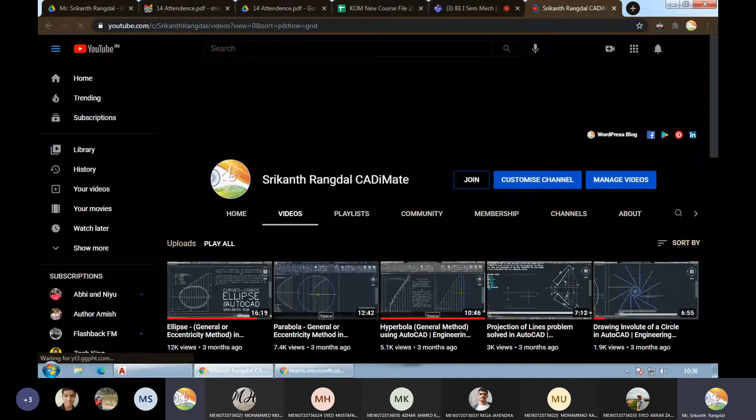So there is one video which I have already recorded some time back, that is projection of lines, and that problem is the master diagram. Okay. So it is the fourth most popular video on my channel. You can see it here, and I'm sharing that to the Teams chat. And also I'll load it to the WhatsApp group.

Okay, so in today's class, please watch this video. The video length is 7 minutes, so I will give you 15 minutes to watch this video, because some students will be joining late. Some students may want to repeat something which I have told in the video. So take around 15 minutes to watch that video, understand this problem, try to do the problem as it is, the same way it is explained in the video, in AutoCAD.

So after 15 minutes, if you have any doubts, you can raise your hand, I will clear those doubts, and after clearing the doubts, I will take up one or two other problems based on the same topic. Okay.

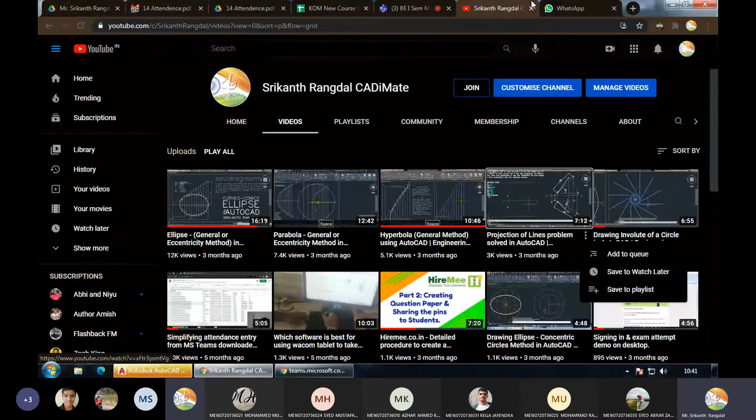Okay, still loading. What about others? Only 13 members joined today. In the first hour also the strength was the same. Yes, sir. So some people want to take a break, it seems. And if that is the case, then we may have to repeat this topic again. Still loading.

So everyone has started watching that video? Yes, sir. Watch it and parallelly try to do that problem in AutoCAD. Yes, ma'am? Can you share that video in WhatsApp? Yeah, it's coming up. Yeah, shared. Staff room, new staff room.

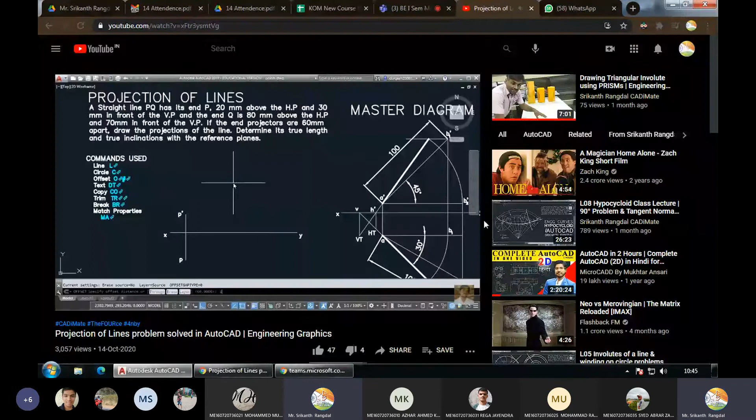Hello. Are you getting the sound of this video which I'm playing? Not clearly, sir. We just watch it on YouTube, but we can adjust it by using the headphones. Yeah, so you watch it on your YouTube app. From here, I'm unable to play it correctly. I don't know why sound is not coming for you. Just 5 more minutes, then we will start taking the doubts. So anyone who has a doubt can start asking. There is no problem.

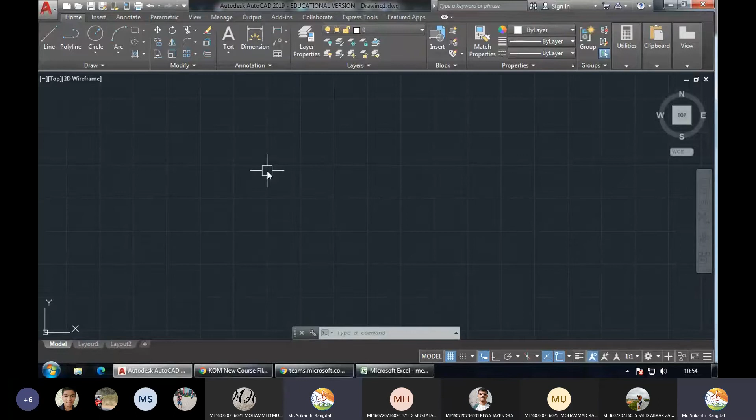Excuse me, sir. Hello. Hello. So I hope you are done watching this video. Are you all working on that? Please confirm. Hello, are you getting my sound? Yes, sir. You're audible, sir. Very good. So have you worked on that?

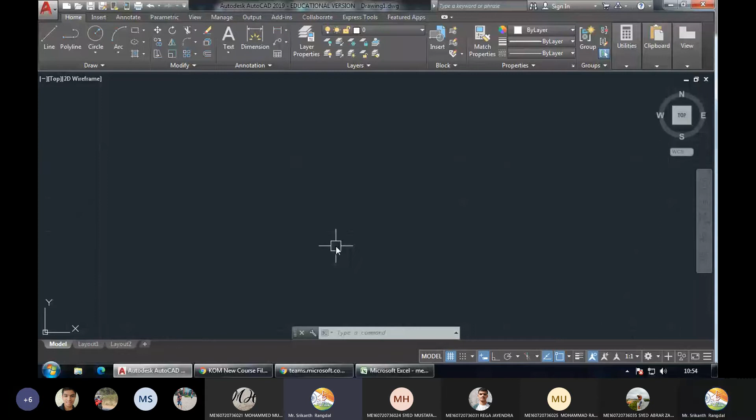How many of you have done that problem? If you have completed the problem, please raise your hand. Okay, no raised hands. Nobody completed that. It seems you need more time to do that. So take your time, but complete it.

So this is a very important topic, because this topic helps you find out the length of inclined lines in 3D space. Sometimes you are required to find the shortest distance between 2 points in space. So how will you find that? There are various methods, but projection of lines is a graphical method to solve that kind of problem.

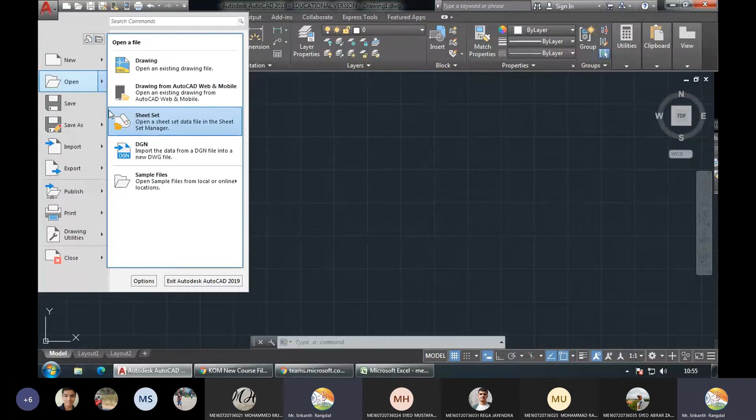Okay. So I will just explain to you the master diagram once. If you are watching the video still, please stop it and listen here once. Where is that thing? It's just here. CAD.

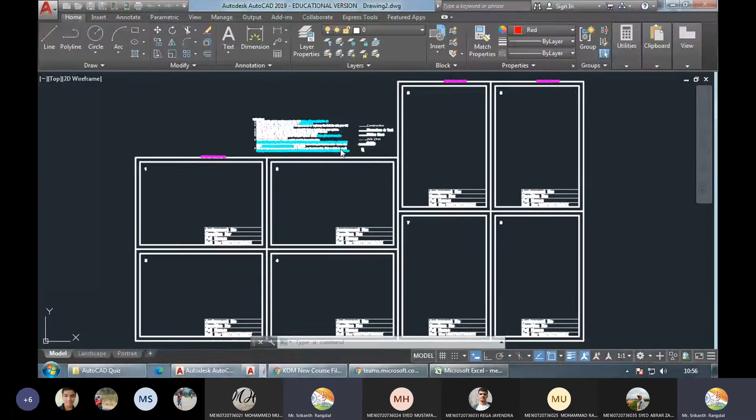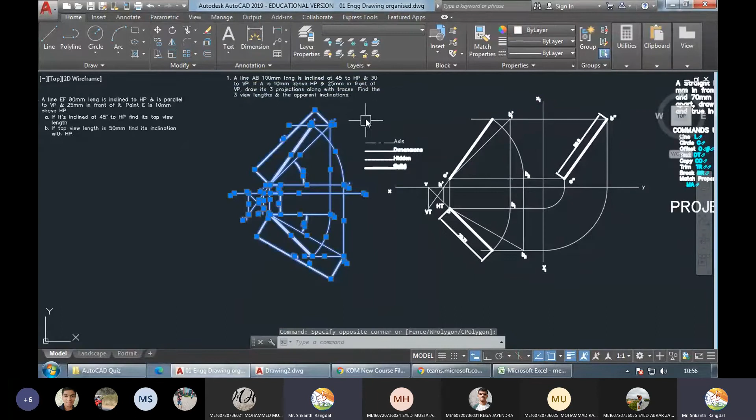So as I told, this problem that we are solving today is the master diagram for projection of lines. If you understand this one problem perfectly, with this understanding you will be able to solve any problem that you come across on projection of lines. Okay, so this is the problem. Just take this into the template. There it is.

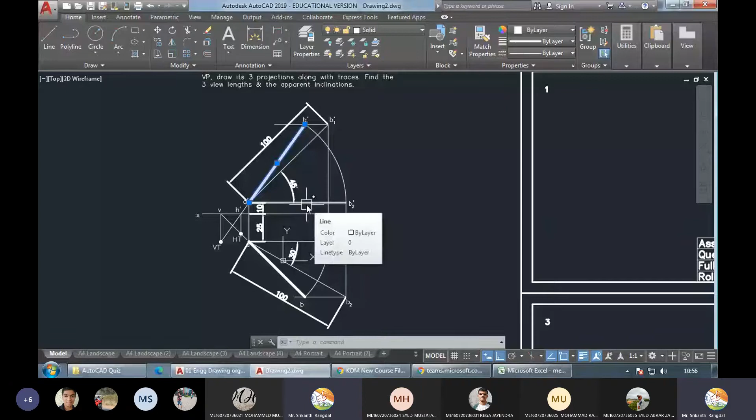Now once again, this is a line which is present in 3D space, and we are drawing it on a 2D plane. So this is something which we should understand perfectly. Now let me go ahead and explain to you the process.

So first of all, if the line is placed horizontally, then the actual length will be visible in both the views, in the front view as well as in the top view. Are you getting it?

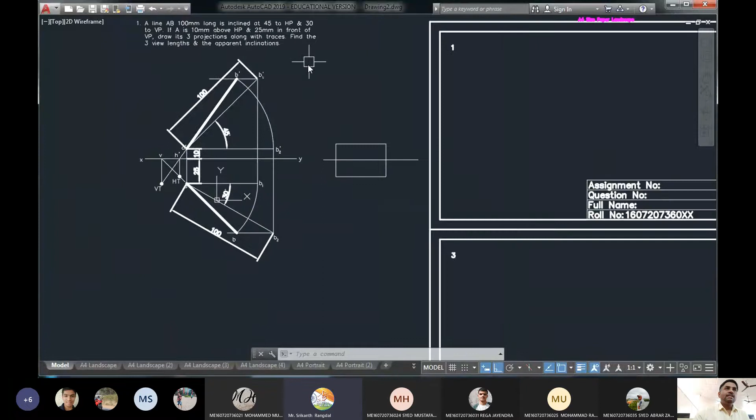Now today, we are considering a line position wherein the line is inclined to both the planes. We have to understand in a step-by-step order. So first of all, let us understand when the line is inclined to a single plane, and then we will take both the planes at the same time.

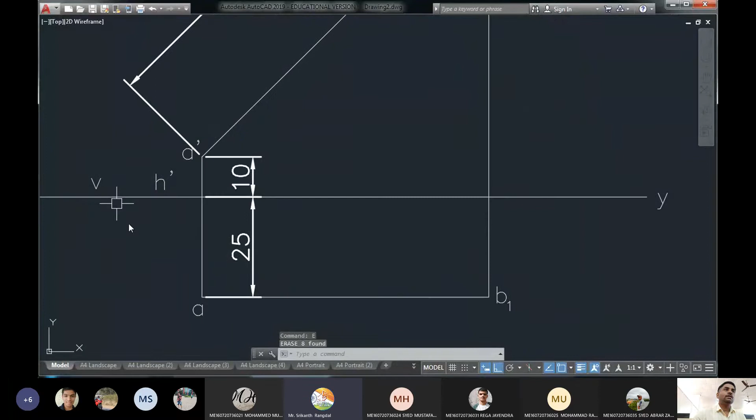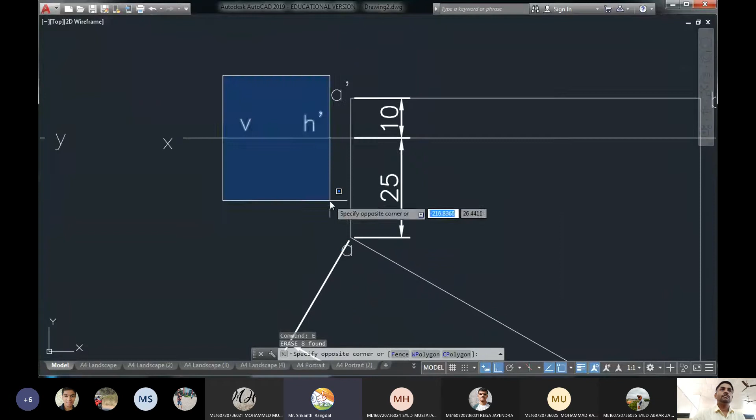So in the first step, I will just assume that the line is inclined only to HP. All this also will not come. So this is the line which is inclined only to HP. Now here in this problem, I'll delete everything, and we will take a situation wherein the line is inclined only to VP. So here the line is inclined only to VP, and here the line is inclined only to HP.

Now let us understand these diagrams with the help of this plane. Can you see this plane? VP, HP, can you see this? Yes, sir. So let us say that this line is the line AB. Now when I'm placing this horizontally like this, what will happen? The true length will be visible both in the top view and the front view.

But when I start inclining it with the HP, in which view can we see the angle? Front view. We can see the angle in front view. Very good. And in which view will the true length be visible? True length means? Whatever is the length of this pencil, the same length should appear in the projection. So in which view can we see the true length? Front view, sir.

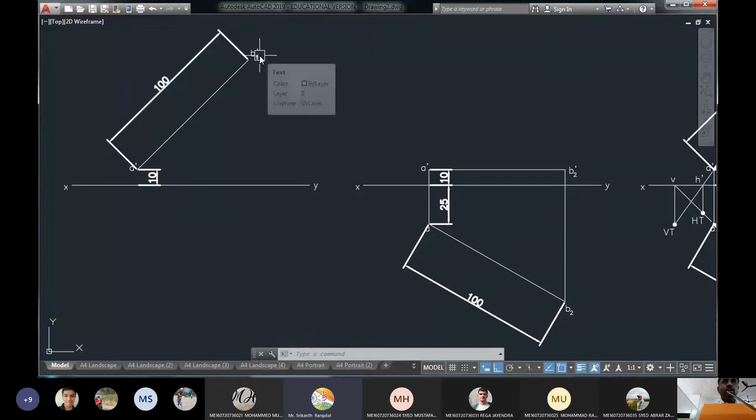Very good. So we can see the angle of inclination and the true length in the front view. Now this information we will use to first draw the front view. So this is our first step. We have to take a point 10 mm above and draw the front view. In the question, angle with HP has been given. How much is the angle with HP? That is 45 degrees.

So at 45 degrees, we have to draw this line. After drawing this line at 45 degrees of 100 length, we will get this point. Then we have to project this with a straight line and draw a horizontal line to get the top view.

Now top view, will it be of same length or different length? You see, the line is inclining like this. So when it is getting inclined like this, what happens to the length of the top view?

It will decrease, right? Yes, sir. The length of top view will decrease. So by how much it will decrease, we can find by projecting this point, by projecting this point straight.

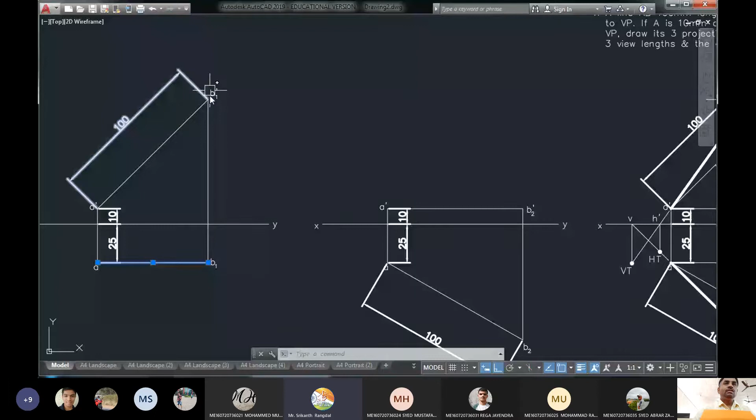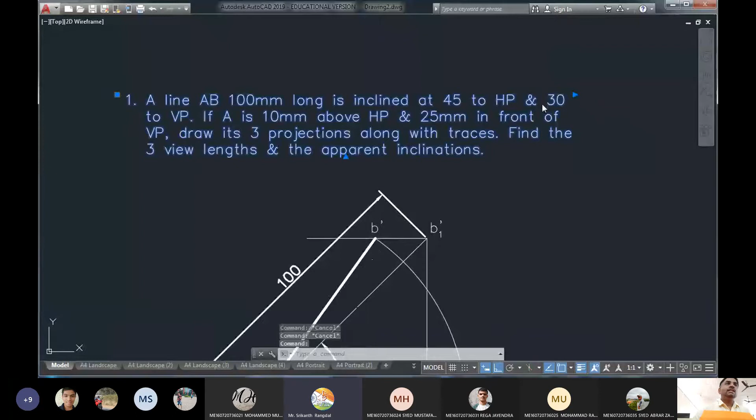Okay. Now the same we have to do for inclination with VP. So angle with VP has been mentioned here in the question. What is the angle with VP? Here you can see it's been given. Okay, this is 30 degrees. So angle with VP is 30 degrees. So first again we have to mark the first point. The front view and top view of the first point we have to mark. Then in the top view, because inclination with VP will be like this.

Can you see my video? Can you see my video?

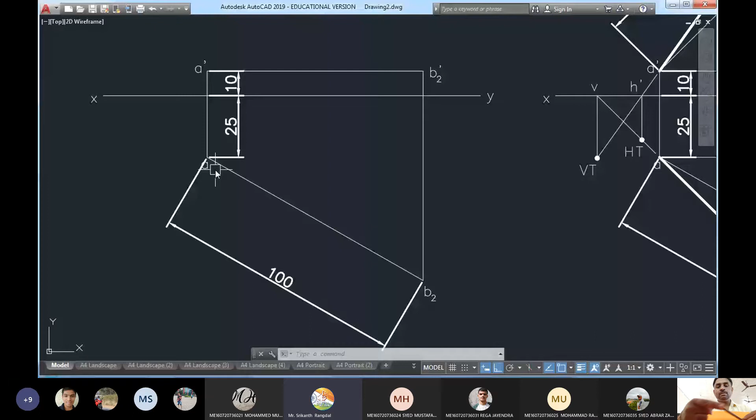Yes, sir. So inclination with VP will be like this. So true length will be visible in which view? True length will be visible in top view, and angle of inclination will also be visible in top view. When you see from top, true length and angle of inclination both will be visible. So that is why we have drawn the angle and the true length over here.

So true length of the line is 100, and you can see the angle that we have drawn. It is 30 degrees. Fine. So this is how first we have to draw the top view. After drawing the top view, coming to the front view. Now, what is the length of front view? Is it same or changing? When the line is getting inclined, the front view length, will it change or remain the same? Change, sir. It changes. Very good.

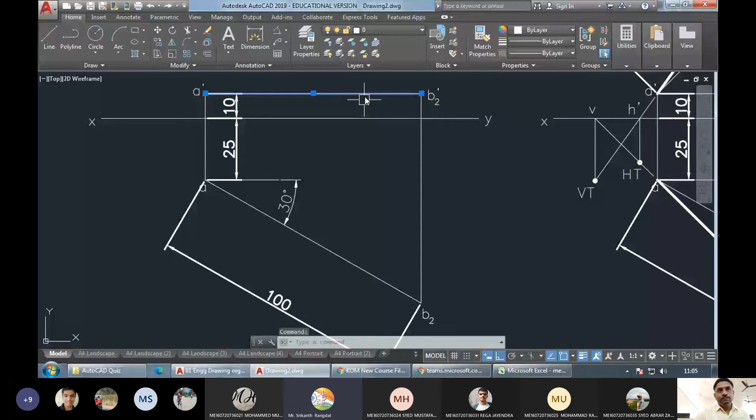So how much it will change? That we can find by using this projection line. Okay. So this angle of inclination, depending on how much it is turning, if it is turning up to this point, let us say, from here we have to take a projection, and this length between these two lines is the length of the front view. In our case, for our problem, angle given is 30 degrees. So from 30 degrees, this point we have drawn a projection, and this is our front view.

Okay. So these are the two problems. Sometimes you will be asked only for these type of problems. When the line is parallel to one plane: in this case, line is parallel to VP and inclined to HP, and in this case, line is parallel to HP and inclined to VP. So some problems you will be asked only to solve till this point, so you can just solve it and leave it here itself. In some other problems, you will be told to find the projections when the line is inclined to both HP and VP. So that's where this problem will come up.

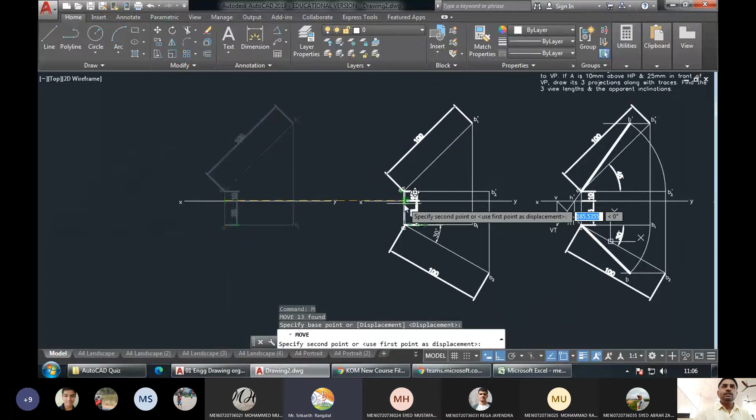Fine. So both these diagrams we have to draw overlapping each other like this. Now we have to find the position of line when it is inclined both to HP as well as VP. So how to do this? For doing this, the theory you should understand. So suppose I am maintaining this angle constant.

My video is visible? Is the video visible? Yes, sir.

So suppose I am maintaining this angle constant and I am rotating the pencil. Now tell me what happens to the top view and what happens to the front view. What is the path that the front view and top view of this point will traverse? So when it is rotating like this, keeping this angle constant, first let me ask you, what happens to the top view? Its projection. What is the path taken by the top view?

Top view travels in a circular path, right? Yes, sir. Top view travels in a circular path. And what happens to the front view? When it is rotating like this, what happens to the front view? Front view will travel in a straight line. Again, front view will travel in a straight line. Yes, sir.

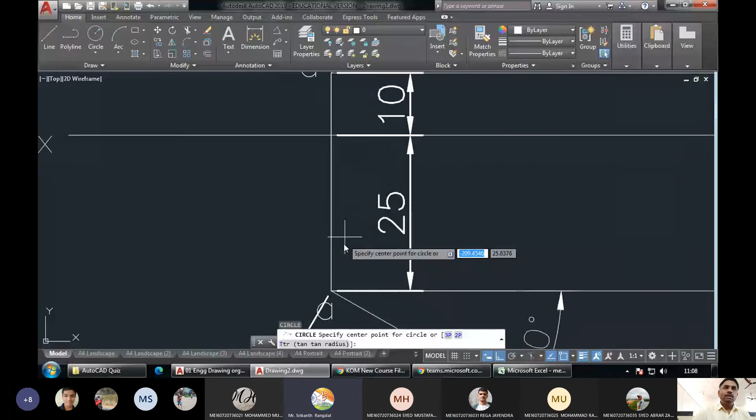So top view will travel along a circular path. So this is the circular path. And front view, this is the front view, right? So front view will travel in a straight line. Correct?

Now same way, when we take up the inclination with VP, this angle I want to keep constant and I want to rotate it like this. Are you getting it? Angle with VP I'm maintaining constant and I'm rotating the pencil like this.

Now, what is the path taken by the front view? Front view will be traveling along a circle, right? And what happens to the top view when it is moving like this? Top view will travel in a straight line.

So that's what we have to do now. So take a circle from this point straight here, and this will travel in a straight line. So now we want both the conditions to be satisfied. We want the line to be at 30 degrees to VP, and at the same time we want it to be at 45 degrees to HP.

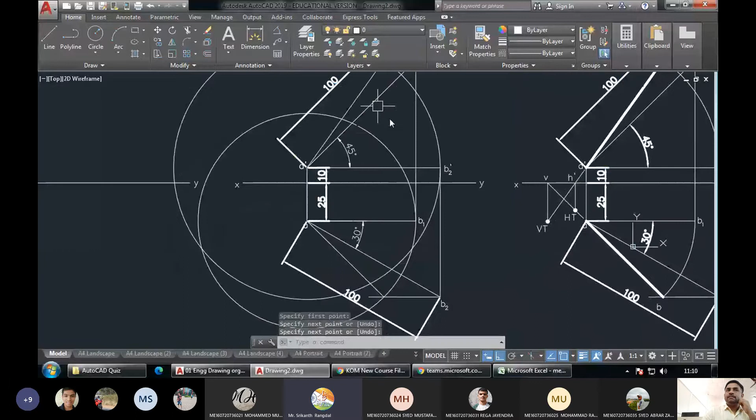So you can just trim them by selecting these two lines. TR, enter. Enter you have to press a single time when you are selecting the lines. So after selecting lines, press TR, enter, then click on the part of the circle which you don't need. So this completes our diagram.

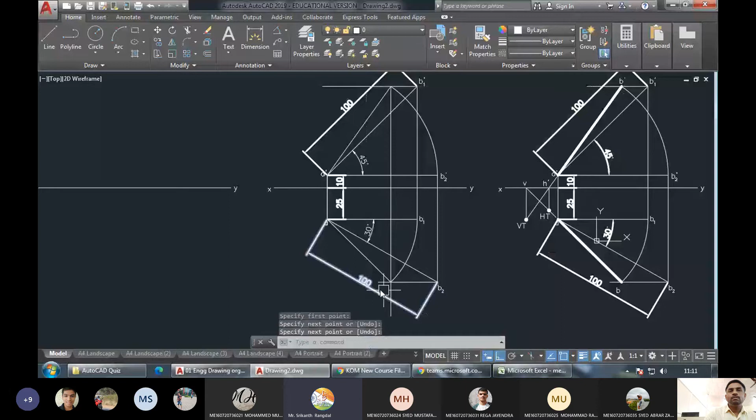Now one thing you have to understand here is, after drawing the complete diagram, if you want to check whether your diagram is correct or not, you have to take a vertical line from this point. And that vertical line should pass through this intersection point. If it is not passing through this intersection point, then you have made some mistake.

So this is like a litmus test for you to check whether you have solved the problem correctly. Is it clear?

Sir, can you just repeat the entire process in a short way, sir? Okay, in a short way. It's already there in the video, and this class is being recorded. But anyway, I'll repeat it in a short way, fast forward.

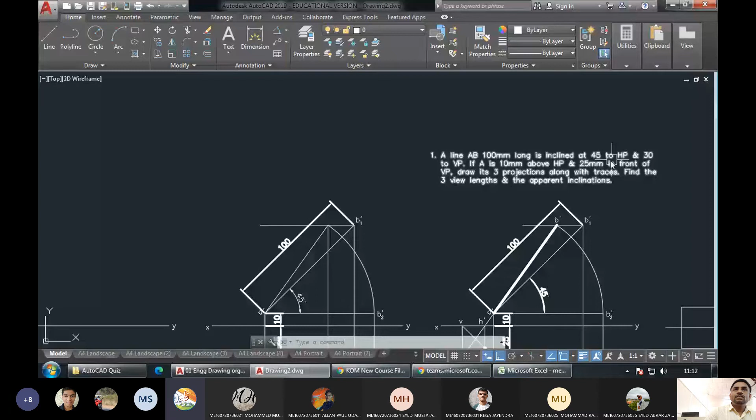So first step, you have to start with one of the inclinations. Either you start with inclination to HP or with inclination to VP. So I'll start with inclination to HP. We have to draw this line, and when you project that, you will get this line. These two lines we will get first. So this is the projection for inclination to HP only.

Then we have to take inclination to VP. So draw this line with 30-degree inclination to VP, then project this till this horizontal line. You will get both the front view and top view for inclination with VP only. Then we need a position wherein both these conditions are satisfied.

So what you have to do, from here you have to draw an arc with center point here at this point, and from this point again you have to draw an arc with center point here. Then you have to draw a straight line, horizontal line from this point and a horizontal line from this point. Okay, the intersection of this arc and this horizontal line will give us the final position of the point B. So this becomes the final top view.

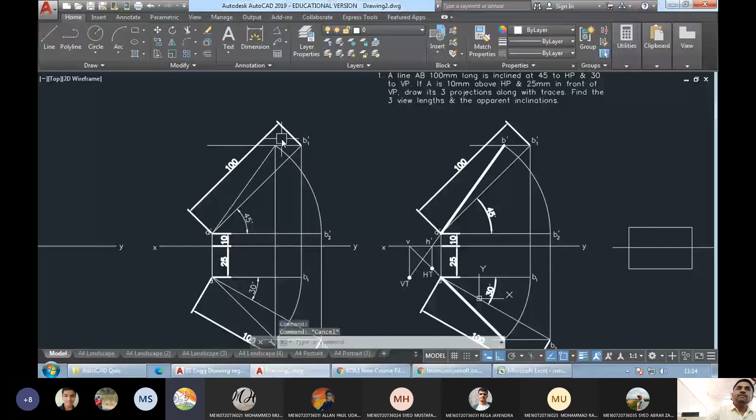Same way, intersection of this arc and this horizontal line will give us the final point, the final front view for the point B. So that we will get it here. So join that to get the final front view of the line. Okay, so this is the final front view of the line.

So now we just have to match the properties. Only what is asked in the question, what is the final answer, that should be made dark. So because this is the final resting place of the line, only that line we have to make dark. Everything else that we have drawn here is just for construction purpose. So it should not be made dark, it should be left as it is.

Apart from that, if you have any dimensions or the names, you have to apply the dimension thickness on that. So use match properties to apply the same properties as the dimension to all the dimensions and all the text. Is it clear? Yes, sir. Thank you, sir.

Okay. So there is one more part here, one last part, and that is called trace. Fine. So trace is a point. Trace is a point of intersection between the line when it is extended and when it meets HP or VP. So there are two traces possible. One is the horizontal trace, where the line intersects the HP. Actually, the line may not be intersecting.

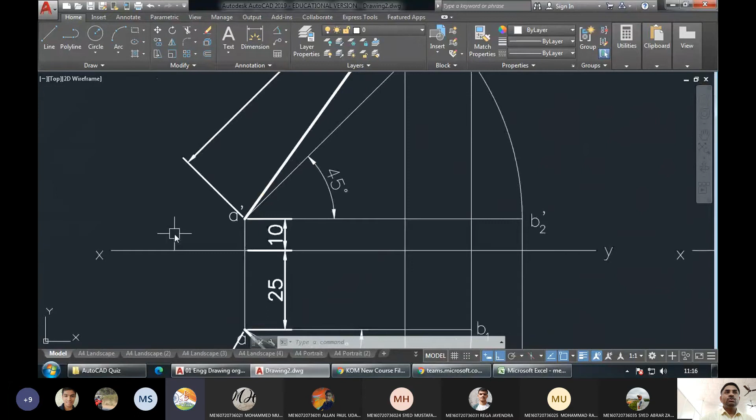So what you have to do is you have to extend the final front view. Don't extend this line. This is just a temporary line, not the final front view. So this is the line which you have to extend. Now, what is the command for extend? Extend command is EX double enter. So EX double enter, you press it, then click on the final front view till it intersects the XY line.

Now this point, what is this point? That is the front view of horizontal trace. So front view of horizontal trace, we have to name it using small letter h and a dash. Because this is the front view, we will be placing a dash.

Next, you should also extend this line. Again, we have to extend the final top view, not the temporary top view. So again, EX double enter, click on this line till it meets XY line. Fine. So what is this point? Now we are extending the top view of the line. So the point that we get here is the point where line meets VP, but it is the top view.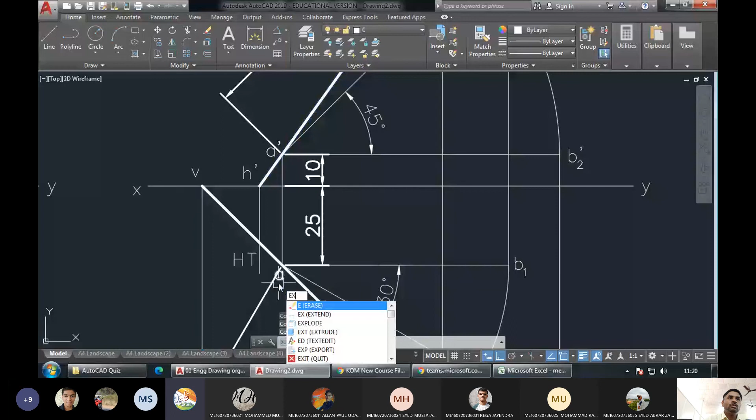Okay. Next step, we already have the top view of vertical trace. Now we have to find its front view. To find the front view, again we have to take a projection line, and we have to extend the final front view till it intersects this line. So once again press EX, double enter, and then go on clicking on the line till it intersects this line. So this intersection point that we got, what is that point?

What is this point? It is the front view of the vertical trace. Once again, we will not be naming it as v dash. We will be naming it with capital letters VT. The reason is same. We are doing this because the actual vertical trace will also come at the same point.

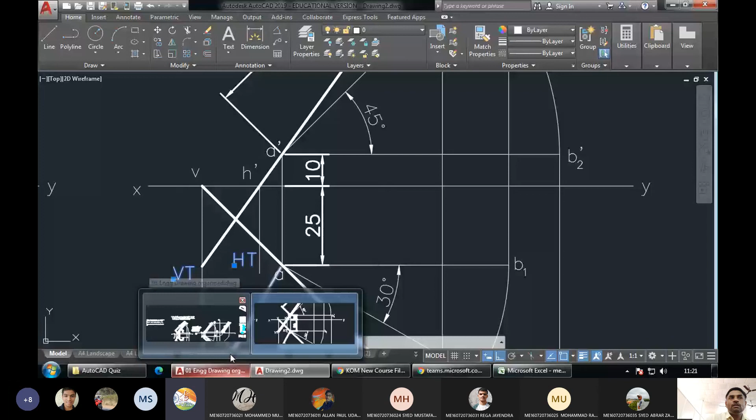Not the front view or top view. Front views and top views we always name with small letters. But this is the actual vertical trace, and that is more important to us than its front view or top view. So we are naming it with capital letters. So that's how you can complete the horizontal and vertical traces. Now these extension lines, they need not be dark.

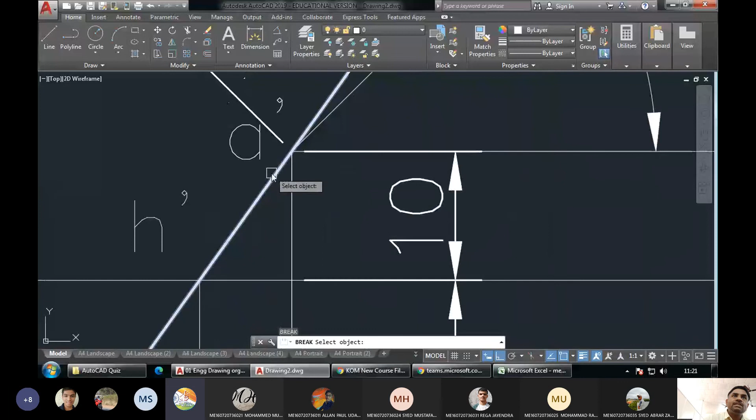So how to solve that problem? We can just use the break command. Write down the break command, BR enter. Use the break command to break a part of this line here. Now this line is different and this line is different. So once again use the break command, BR enter. Click here, after this point, and then click exactly at this point. So this line becomes separate from this line.

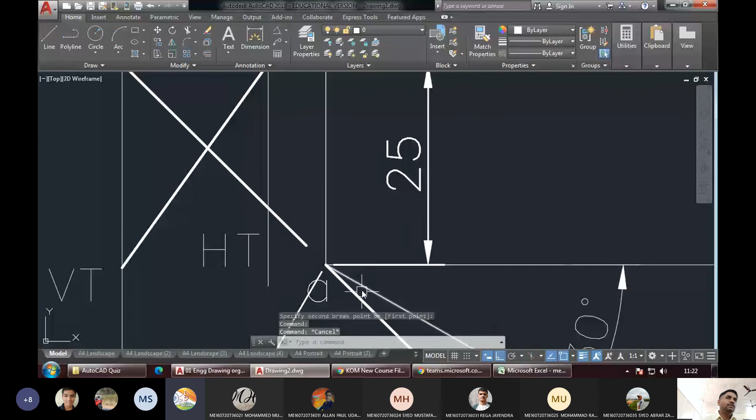Now these two lines, they need not be dark. These two are the final front view and the final top view. They have to be dark. Whereas these two are just drawn for construction purpose, so they need not be dark. So I will use match properties to make them light once again. Okay. So this is how you have to draw the diagram.

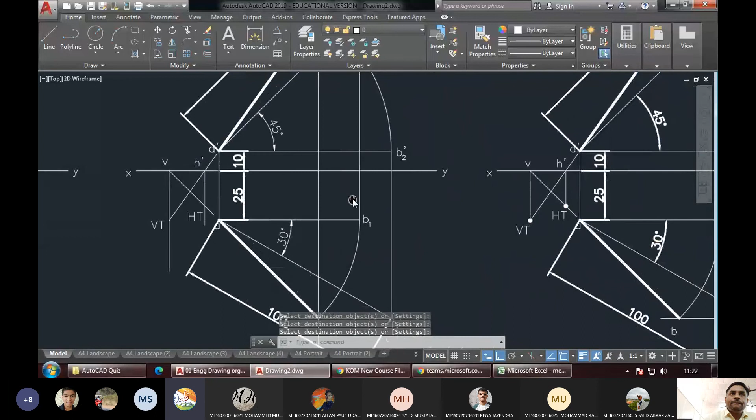Any doubts now? No, sir. No doubt. If you have any doubts, please raise your hand. I will solve that doubt and then we will stop here. Everyone has understood the problem? Some students have joined late, I can see that. So latecomers, have you understood? Yes, sir.

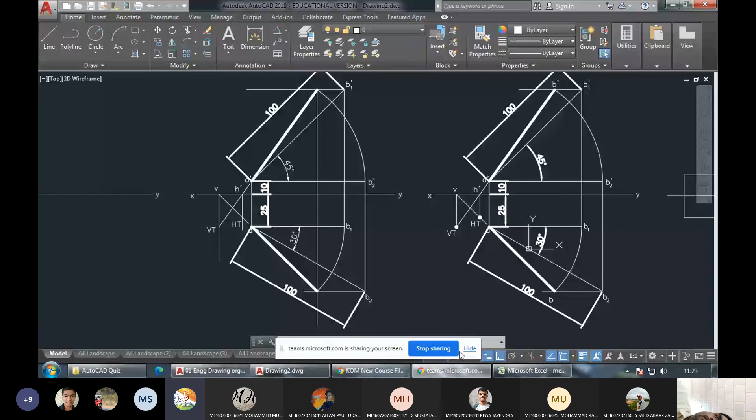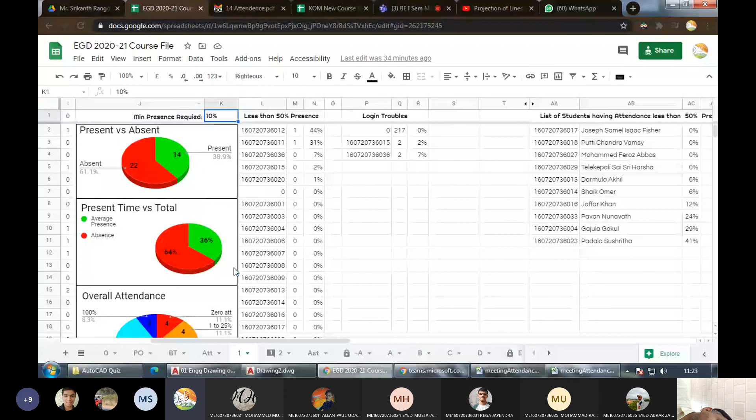Do you want me to call out the names of who were late? Okay. Better.

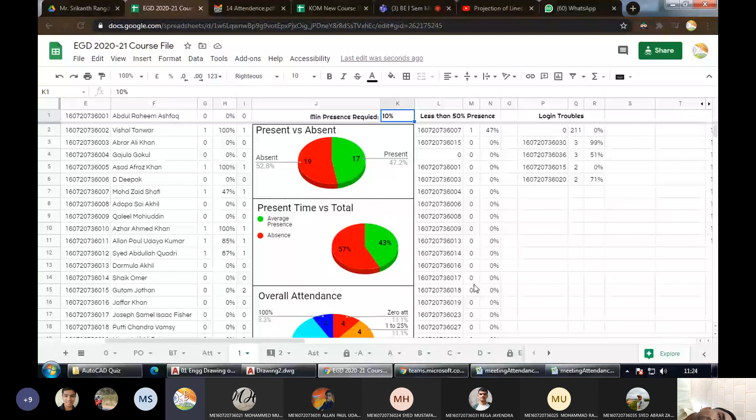So I think when I started explaining the line problem, most of you were present. So I'm assuming that you have understood this problem because you are not raising your hands. I'll just have to assume that you have understood it. There's no other option for me.